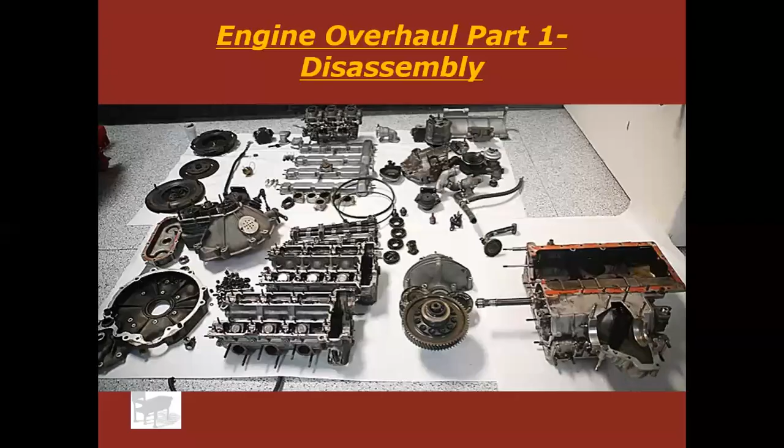We are talking about engine overhaul, and we're going to jump into part one today, which is just disassembly, just taking the engine apart. Try not to get too complicated here because this is going to be a pretty new, pretty fresh thing for a lot of people. So we're just talking about taking it apart, but there are some tricks to disassembling it. You can't just rip it apart. Okay, you can hurt some stuff. So we're going to go through that.

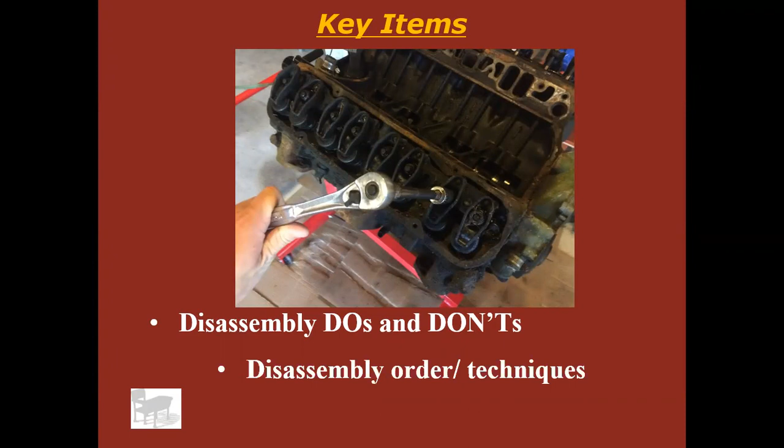All right. So we're going to talk about do's and don'ts of disassembly and the order of disassembly and some techniques. All right. So there's a pretty good video here. It's kind of long. It's about 18 minutes, but I would strongly recommend that you pause my video now and watch this one. All right, you should just watch that video. Pretty good video. Doesn't show everything, but pretty good video. Kind of gets you the idea.

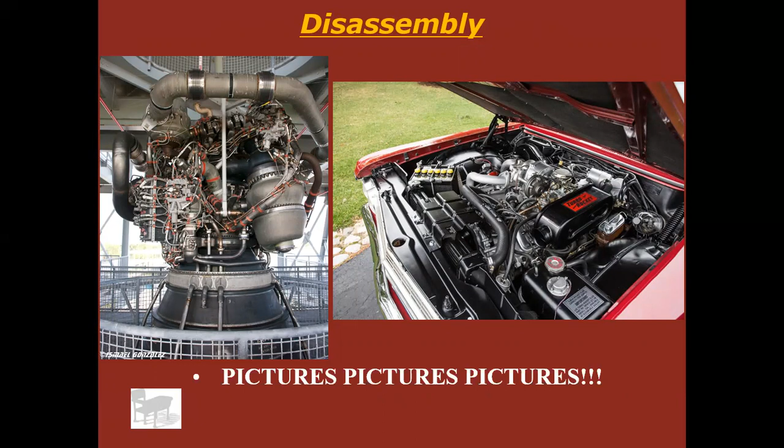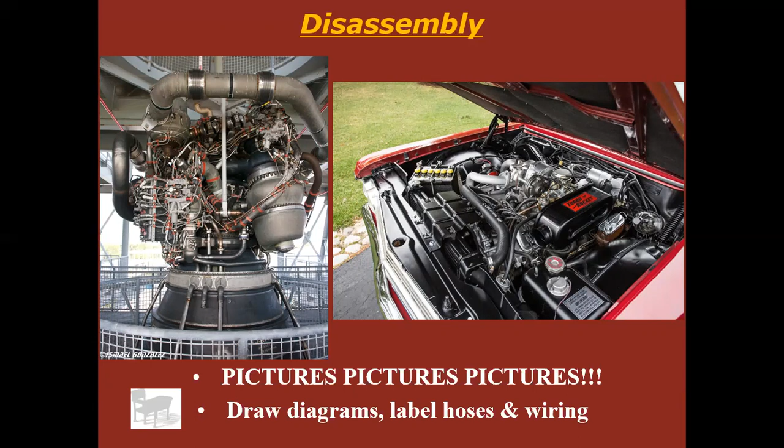All right. So first thing I'm going to tell you to do before you take anything off is take a bunch of pictures. Take pictures on your phone, borrow the classroom camera, take notes, draw diagrams, whatever you need to do. But there's always going to be something you have a question on later, especially if you're actually pulling this engine out of a car, taking it apart, and then you're going to put it back in the car later when you're done. There's always going to be something that you don't know where it went, don't know how it came out, don't know how it goes back. So take lots of pictures. You're going to need them.

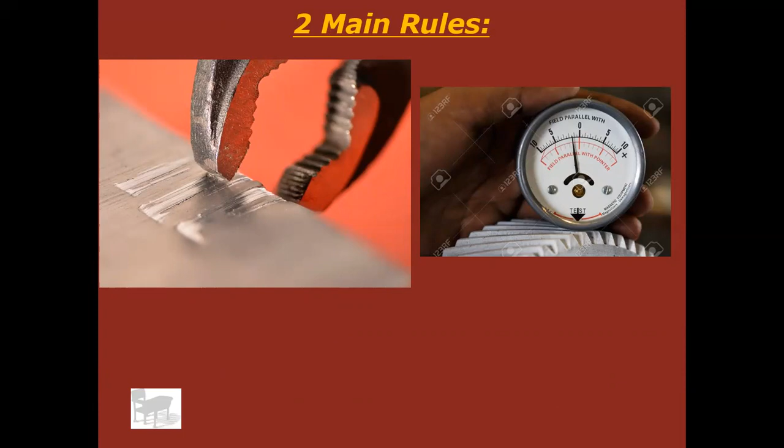Okay, if I could narrow this presentation down into just two rules, or just take all 22 slides or 21 slides, delete all of them and just make one slide, I would narrow it down to this. Don't leave tooling marks on any engine parts, okay? Just like what you see from the pliers there. And don't use a magnet. If you follow those two rules, you're going to do better than most people do when they take apart an engine. So just think about those two things. All right.

By the way, let's go back to that for a second. Why don't we want to leave tooling marks? Well, there's a couple of reasons. They create little stress points in the metal. And then if that part heats up and cools and heats up and cools, it expands and contracts thousands of times after you reinstall it in the motor, eventually those little tooling marks turn into cracks, and eventually they crack through, and then that part breaks.

The reason why you wouldn't want to use a magnet is that metal parts absorb magnetism. So if you use a magnet to pick a bolt up out of an engine, that bolt will then, in theory, be magnetized forever until it gets demagnetized, which we don't have the capability of doing, and most people don't. But anyway, that bolt is magnetized forever.

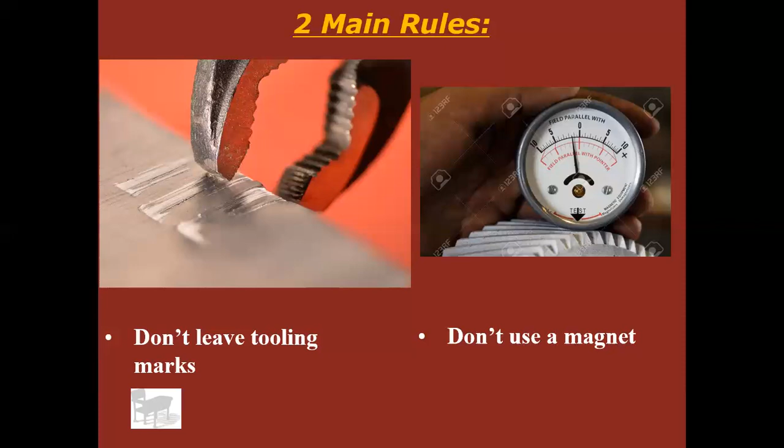So you reinstall that bolt in the engine later on, and what happens is that bolt then attracts little bits of ground up metal, hangs onto them. That bolt's attached to a bearing or camshaft or something like that. You're attracting little bits of metal and contamination to that moving part, which you don't want to do. You want those bits of metal to get caught in the oil filter, not in a camshaft or a crank main bearing or a rod bearing or something like that. So we don't want to use magnets on engine parts.

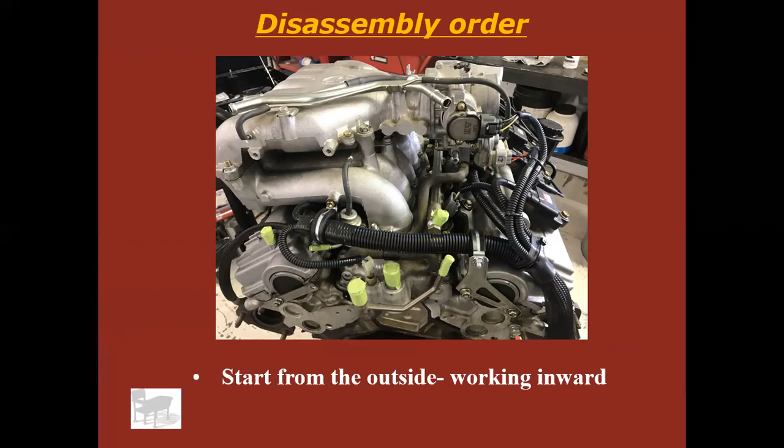Okay, disassembly order. You're going to start from the outside and work your way in. So first thing I would do is get all that wire out of there. Get the wiring harness out of there. Get the sensors out of there. Those extra things, hoses. Now wouldn't be a bad time to take hoses off. Remember, pictures, because you're never going to figure out how these were routed if you don't have photos.

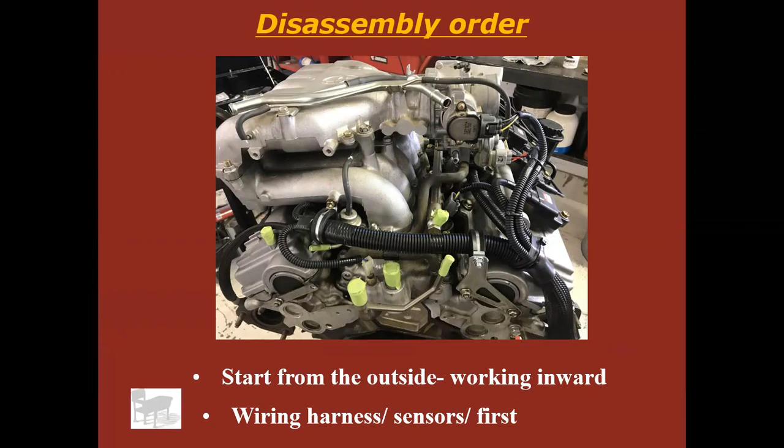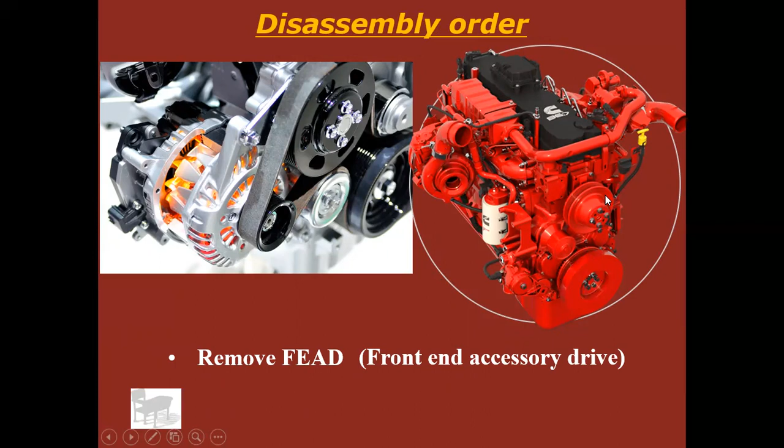Next, I remove the FEAD, and that's an industry term, and it stands for front end accessory drive. So that includes alternator, water pump, belt tensioner, crank damper, air conditioning compressor, whatever is up here that has a belt attached to it, belt pulley attached. All right.

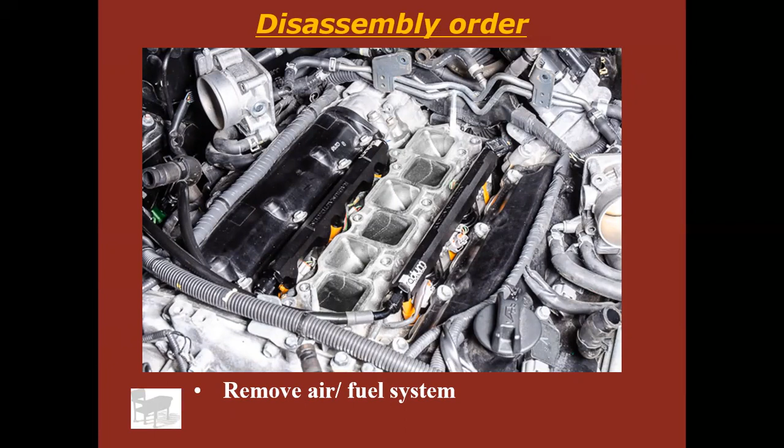Remove air and fuel system. This could include turbocharger, throttle body, intake manifold, fuel rails, that type of stuff. Carburetor. All right, then it's down to the cylinder heads. Here's where it starts to get complicated. Here's where you actually need to know what you're doing, or you can mess stuff up.

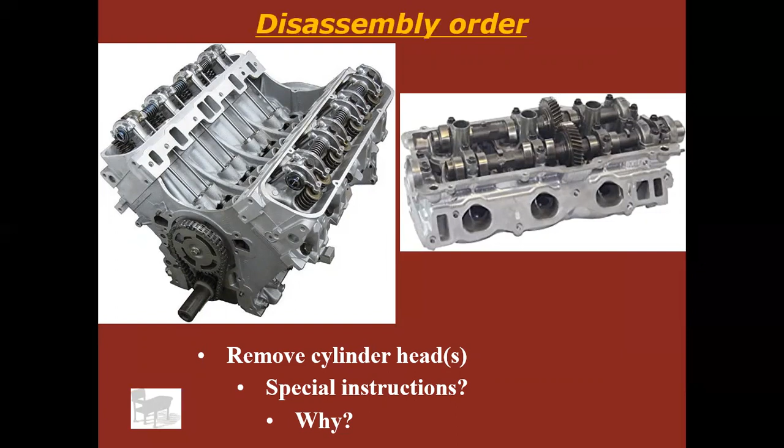Okay, so remove cylinder heads. There are indeed special instructions. And you might ask, what are the special instructions? Well, we're going to watch a video on it in a second. The short answer is you can't just take the bolts out. You have to take them out in the right order, or else you can warp or crack a cylinder head or camshaft. Okay. Which, again, we'll watch a video about that in a minute here.

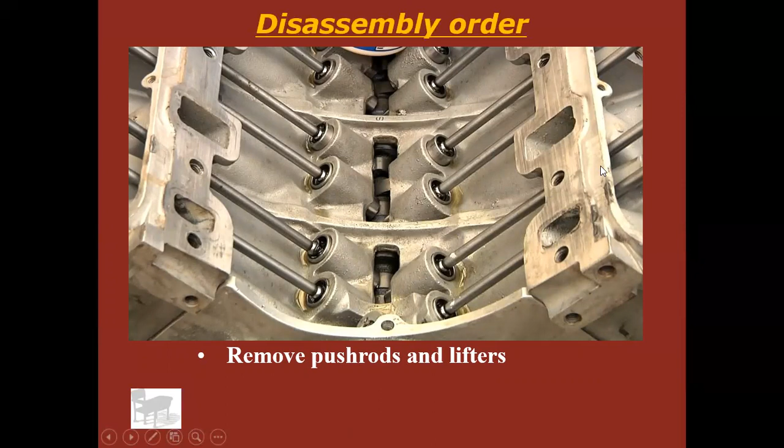Okay, once you remove the cylinder heads, I would remove the push rods and the lifters. There, if you don't know, those are the push rods, those long rods. The lifters are down in those little bores there, those little circular things. All right, how do you remove the lifters? That's a discussion you want to have.

There's different ways. I'll tell you right now, the way I was taught in school was to use a piece of brass safety wire and bend it into a hook, grab the lifter and pull it out. That doesn't always work though. Why not a magnet? Remember, if you use a magnet, you're going to magnetize lifters and those are going to attract metal. Don't want to use a magnet.

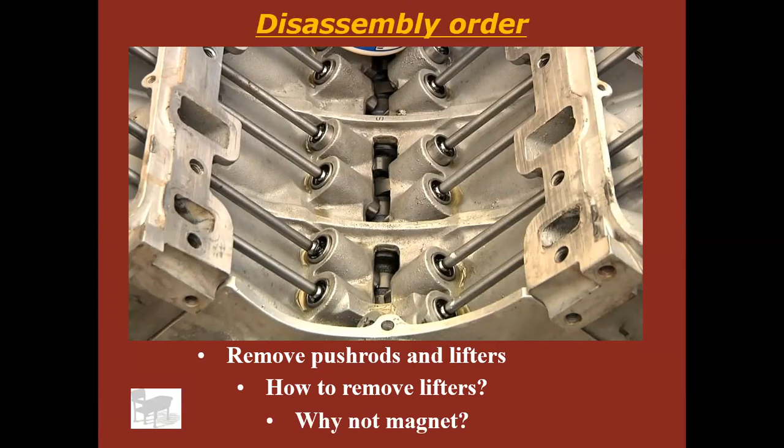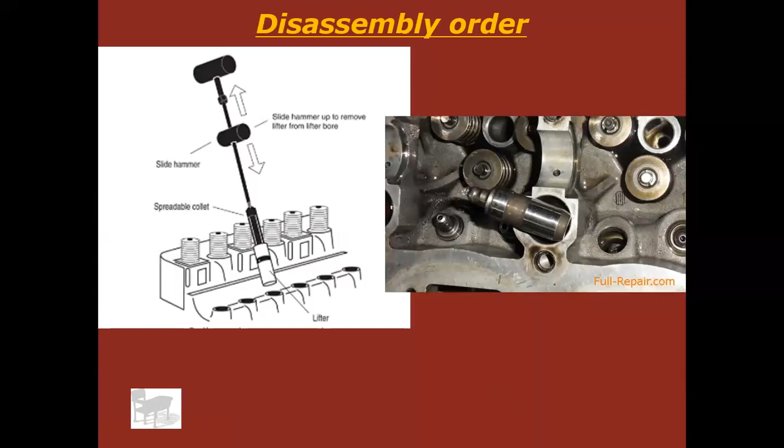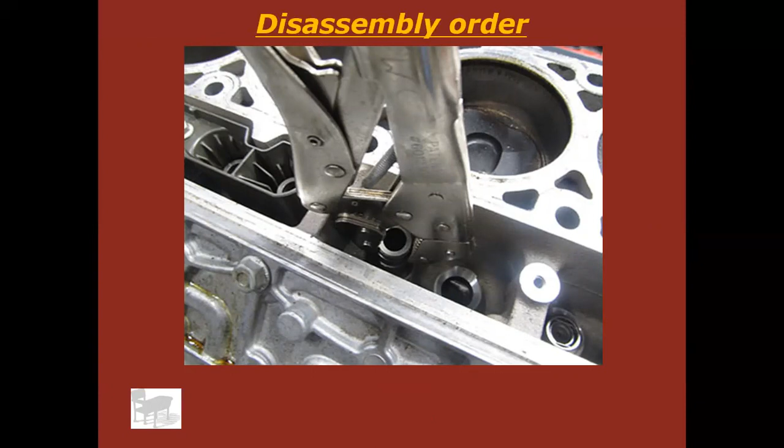Okay, how about this? Same thing, they're just using, not channel locks, vice grips or adjustable locking pliers instead of what we were just looking at. So yeah, once again, no, do not use pliers on lifters. Okay, that will get it out. Yeah, and if you're going to take the lifter out and throw it away, I guess that's okay, but it's just a bad habit to get into and it just kind of looks shoddy.

Okay, so remember a few slides ago, I talked about removing cylinder heads and how there are special instructions for it. Just as an example, here is a screenshot out of the Ford factory manual for a Ford 2.0 liter 4-cylinder engine. Super common, right? Used them in Focuses and other things like that. And if you're going to remove the cylinder head or even just remove a camshaft, you can't just take the cam out. You have to take it out in sequence.

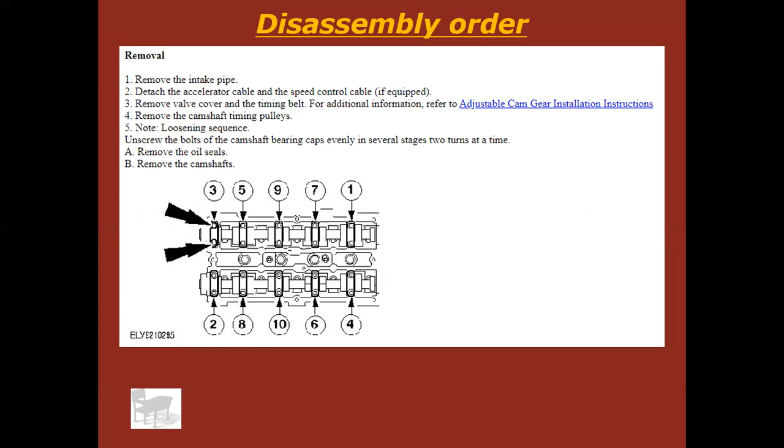So this is from the factory Ford manual, telling you the sequence of how to loosen the camshafts and get them out, not how to tighten them. This is how to loosen. It's a loosening sequence. If you do not follow this, you can snap a camshaft, you can warp things, you can break things. So you need to look at the manual before you take things apart sometimes, and this is a good example of that.

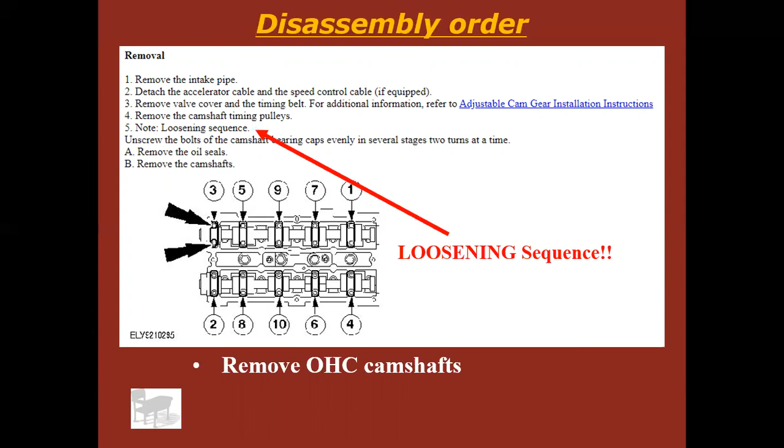All right, here's a great video. The guy can be a little bit hard to understand at times, but it's a great video. Go ahead and watch that at this time. All right, you should have just watched that video on how to remove a cylinder head. He talked about going in a certain order to remove the cylinder head so it does not warp or crack.

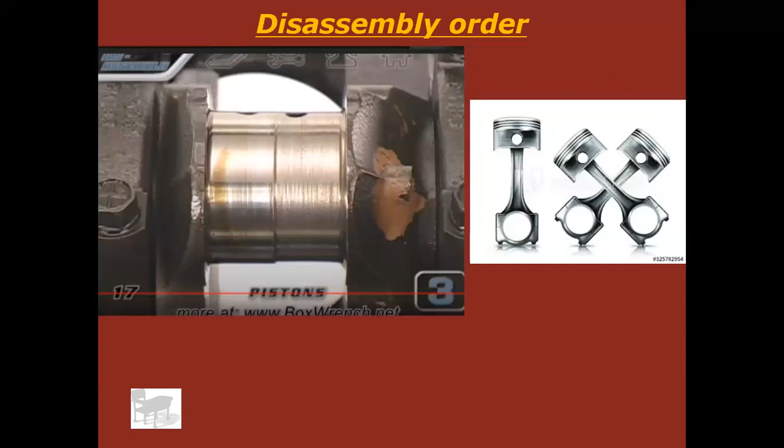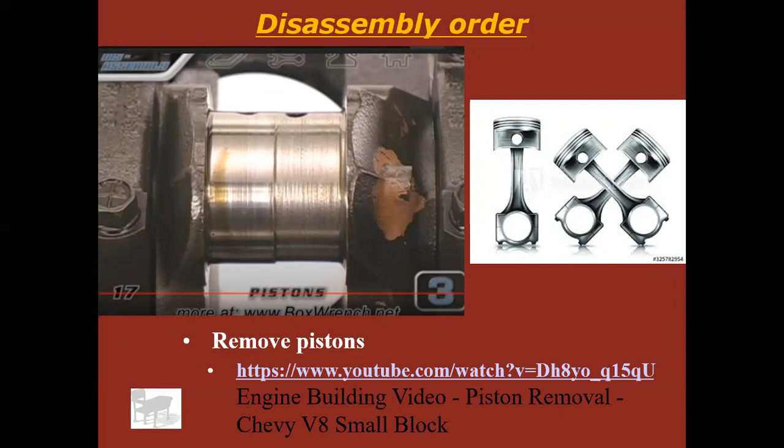So now that we got the heads off, let's remove some pistons. Speaking of that, let's watch another great video. Go ahead and watch that one. Okay, you should have just watched that video on how to remove pistons. Love it. He did everything by the book, I would say. Don't forget to put those fuel line protectors or fuel hose protectors on the threads, as he did when he was pushing the piston out, so it does not grind down on the cylinder walls and scratch them, or scratch the crank bearing journals. So very good video.

Now that we got the pistons out, let's take a camshaft out. First, we're going to talk about removing a central cam, because we already removed the overhead cam a couple slides ago when I talked about that Ford Focus factory loosening sequence. So now let's remove a central cam, or some people call it an overhead valve cam engine.

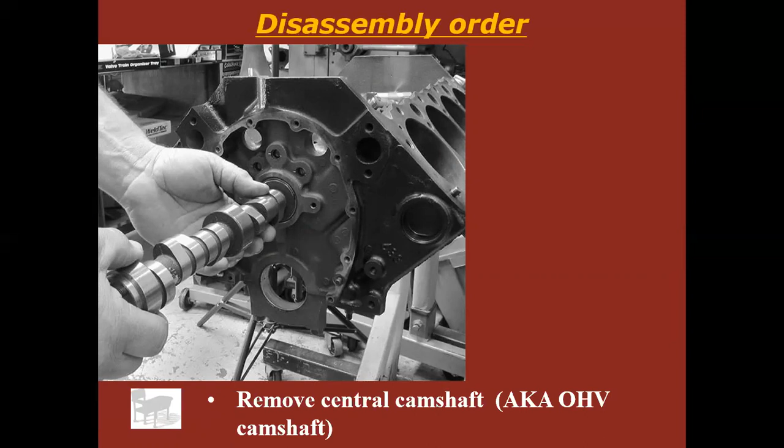Notice as he was removing it, he's being pretty careful, and you probably saw that in the earlier video also. He's not dragging the cam, he's not just ripping it out, he's just kind of slowly walking it out of there, bearing by bearing, lobe by lobe. If you just drag these out, you're going to trash the bearings, and they will peel apart after you drive the thing 1,000 miles. So definitely take care with this, because the edges of those cam lobes are razor sharp. You can cut your fingers on them. So if you can cut your fingers on them, you better believe they can tear up a lead faced bearing.

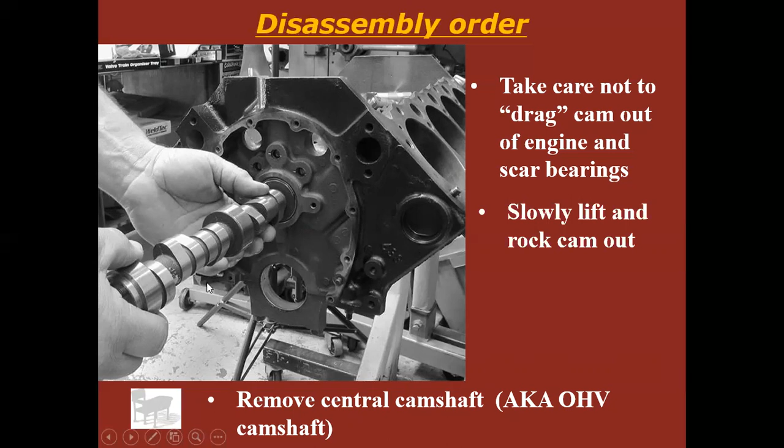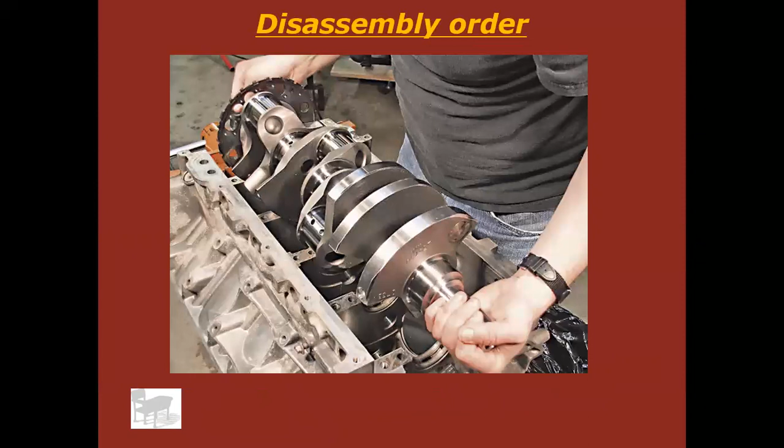All right, now the cam's out, let's get the crank out. You're going to remove the crankshaft main caps. You just wiggle them back and forth and they just pop loose. So nothing too crazy. Let's remove the crankshaft itself. After you remove the main caps, you're just going to lift the crank out. Don't drop it.

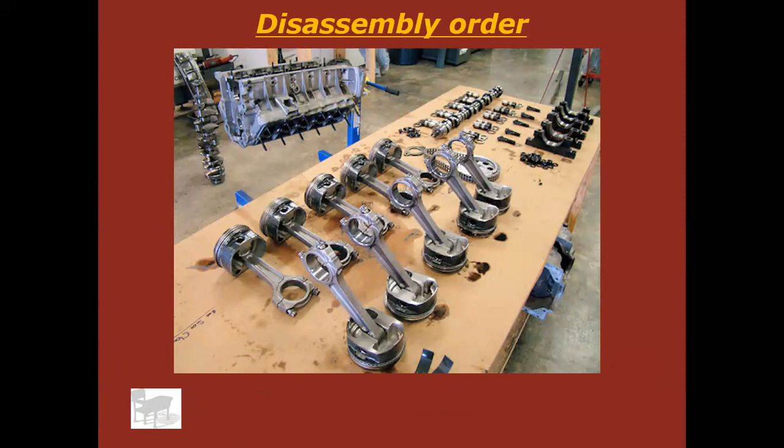By this time you've probably got your whole block disassembled, and then you can make sure that's laid out nicely on a table. Make sure things are labeled. Make sure things are in bags. They don't do this in these pictures, but put just your rocker arm in a bag and label it cylinder 1. Put just that lifter in a bag, label it cylinder 1 exhaust, label another one cylinder 1 intake. Don't mix them up. It's okay to use up the plastic bags. Keep things separate, keep them labeled. Remember, you don't want to mix and match parts when you put it back together. And that's it.